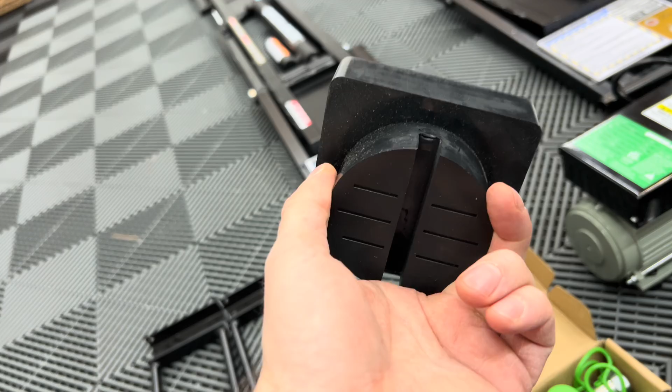All right guys, so I got everything unpacked, what you get in the entire set of your Quickjacks. I did realize you get a few different mounting blocks. You get bigger ones you can use for bigger cars, and also lower profile ones. The ones I got, I believe I was supposed to get the lower profile ones - these are the ones with the pinch weld, which isn't the end of the world since I can use these on other cars. I know my STI had the pinch welds, so those will come in handy in the future, but I'll most likely use these. All they do is sit right in there, and they go right onto the little mounts of where your jack points are on your car.

I was also playing around with the little jack pack, and I noticed on the back it actually lists everything it does, so I wanted to go over that real quick. As I mentioned, it's a 12-volt USB charger, as well as a C port. It's got the LED flashlight, and it's also a battery jumper. Very cool - so if your car is on the side of the road and you have a dead battery, you can actually jump it with this. It has some jumper cables in here, which is pretty darn cool. So there are the jumper cables.

And it's also an air compressor, obviously. It's 150 max PSI, 2,500 peak amps. The thing is pretty darn cool.

Let me just show you the little flashlight. I was playing with this off camera, and it's really cool and nice and compact too. You hold it down there, and wow, that thing is incredibly bright. It also has a strobe and a slower strobe as well. This thing is amazing, I'm kind of hyped about it.

Here's the little ports for the jumper cables, and I showed you over here the USB and C port. I'm stoked about this thing - it's awesome, and the little digital display is very clear and easy to read. This thing is way higher quality than I was expecting.

Not to say I was expecting poor quality, but the overall craftsmanship and robustness of this thing is very impressive. I was pretty surprised about the overall weight of it, which is a good sign that it's made super high quality, not some cheapo thin metal - because you're lifting something very heavy, and you obviously want something very sturdy. But here you go, this is what it looks like.

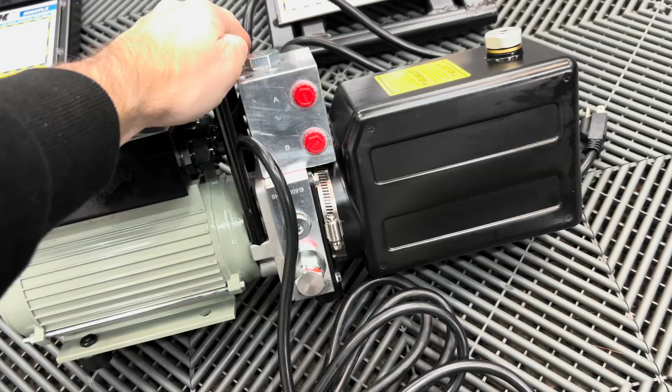I was thinking maybe they filled it, but they probably test these before they send them out, so they have to fill these up with some hydraulic fluid. That is most likely why you're seeing a little bit of residual around here. Don't think your compressor is leaking or anything like that. It comes completely empty, but I'm pretty sure they test these prior to sending them out, so that's why you may have a little bit of residual hanging out.

But here is the control, so it doesn't get any simpler than that. Down, up. The locking system is pretty cool, much like a normal lift. These right here, the little arms, are actually the locking arms. So when you're raising it up, you'll hear it click into different locking sections, so you know the jack is properly locked into place. You lift it up, you hear it click, then you back it off and it'll go down and lock into place.

I do not have ATF fluid with me right now, but I'm most likely going to pick some up tomorrow morning so we can get this thing properly set up, properly bled, and fill these little canisters with some air. We're going to be using the jack pack for that. I believe you have to fill up to 40 to 50 PSI, I'll probably do 45. You can use an air compressor or a pump of some sort, like one you'd use for blowing up basketballs. But I'm going to use a jack pack because I have it and I want to try it out. It's going to be really simple.

One thing I want to mention is that the Quickjack is going to be fantastic on Swisstrax. If you guys know, that's the flooring I use. I have a lot of friends that use these and they work great on it, and as I mentioned earlier, they're very easy to maneuver around on Swisstrax.

The main reason is because when you use jack stands, the weight is so focused on the arms of the jack stands that it can damage the tiles. You can actually see one right there, I just did that the other night. I usually put some foam inserts underneath the jack stands to protect it, and it usually does a good job, but for whatever reason it ended up damaging this tile just a little bit. It's not the worst thing in the world, honestly I have a bunch of replacements, I could just pop it out and put a new one in. It's happened before in the past, and it literally just pops out and pops in, and you're good to go.

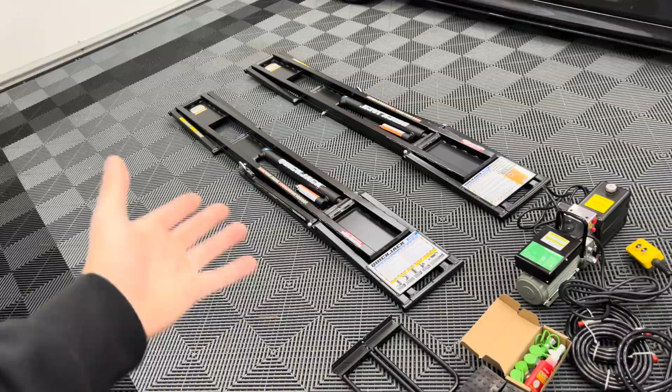You may also know the brand BendPak. BendPak is actually the parent company to Quickjack, so you guys know all the different options and things available from BendPak as well. Who knows, maybe if we get a shop or a larger garage in the future, we can work with BendPak and Quickjack again and get something, maybe a full lift, I don't know. Who knows what the future may hold. But for right now, with my dream F80 M3 and my average size 20 by 20 garage, which I'm incredibly thankful for, these things are absolutely perfect. Again, super humbled, super thankful, can't wait to get this thing set up and used on the car.

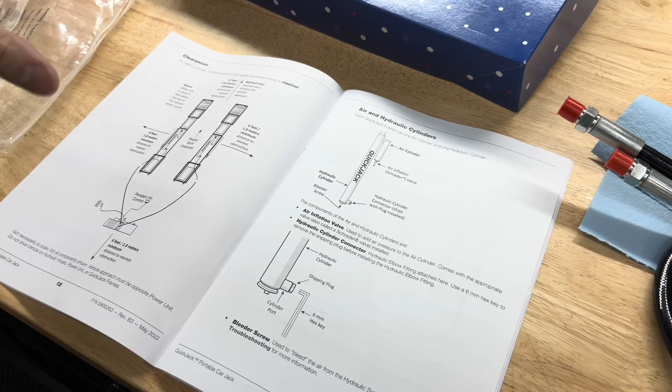What we're actually going to need is everything included in the kit, but there's one thing you need to go pick up yourself, which is some ATF fluid of your choice. It just has to be full synthetic. I went to my local Advance Auto Parts and got some Valvoline ATF full synthetic. I've seen a lot of people use this and they're totally fine. Honestly, as long as it's ATF and it's full synthetic, you're good to go. So what we need to do now is start putting some of the fittings on. We're going to start over here on the hydraulic, and there's actually a plug right here that we need to remove.

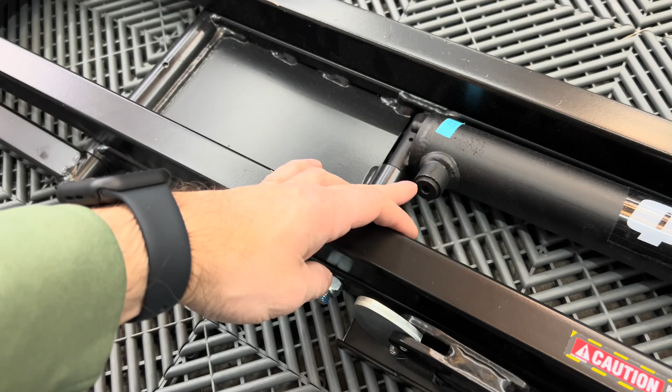I think that's a... I gotta see what size it is, I'll let you know. But we actually remove this, and then we can get the first fitting put in. So they actually say that little plug there is a 6mm, so we're gonna go ahead and get a 6mm out, if I can see it.

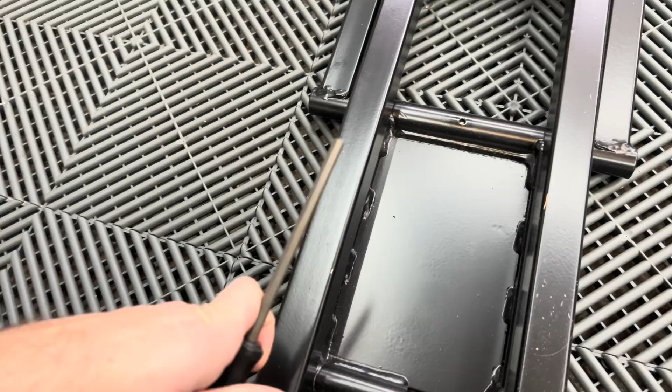Here we go, this is a 6 right there. So we're gonna come over to the Quickjacks and simply just remove this. Oh, I don't know if this is gonna work, I'm gonna have to get an actual Allen key. So that was actually a little big, so I'm gonna use my new Allen keys. Let's see, 6 is the red one right there. All right, so we got the 6mm out.

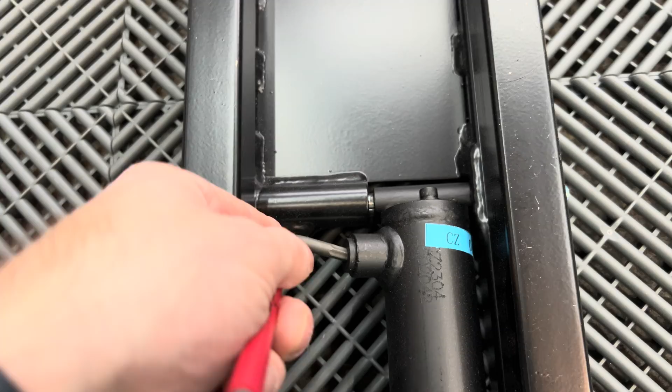We're gonna come over here and simply remove this plug like that. Not much room to work, but once you get it off, I'll show you the next step. All right, so we got the shipping plugs removed.

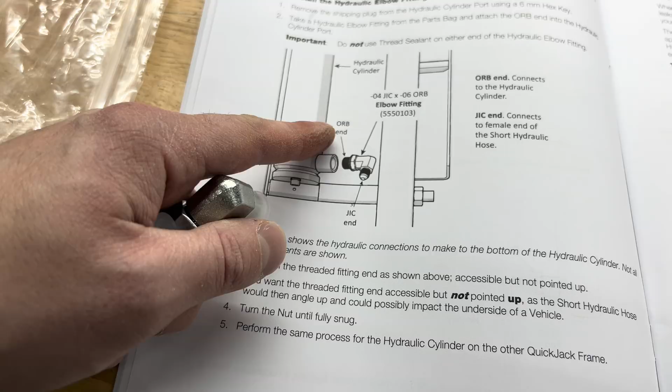Now the next page shows you actually use the ORB end and the JIC end of the little fittings that are in there. The other fittings are quick disconnects, so there's only ones that look like this, and that's what we're going to be using to install on the plugs that were just removed.

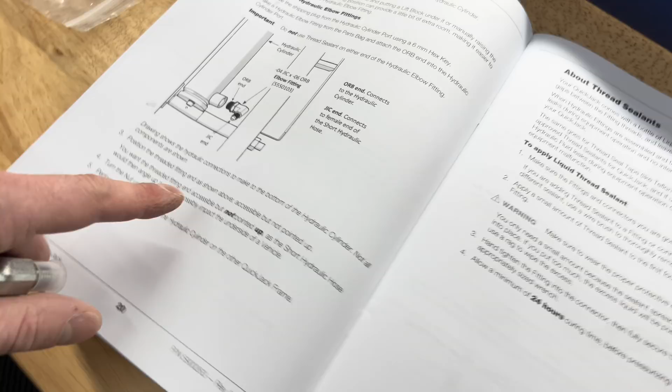Now let's see, you want them fanning, not pointed straight up, but positioned towards the back. I'll show you exactly what they mean. It says position the thread fitting end as shown above. So this is the bleeder screw right back here. You want the JIC end fitted this way above that bar. So I'll show you what that looks like on the actual Quickjack.

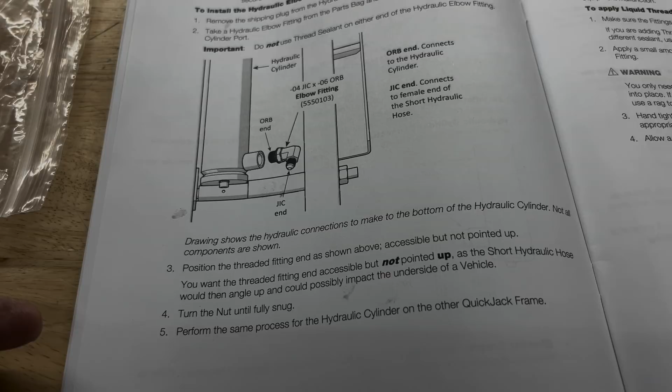Just a quick note, it says do not use thread sealant on either end of the hydraulic elbow fitting. So on these right here, do not use any thread sealant, any tape, anything. These are good to go as is.

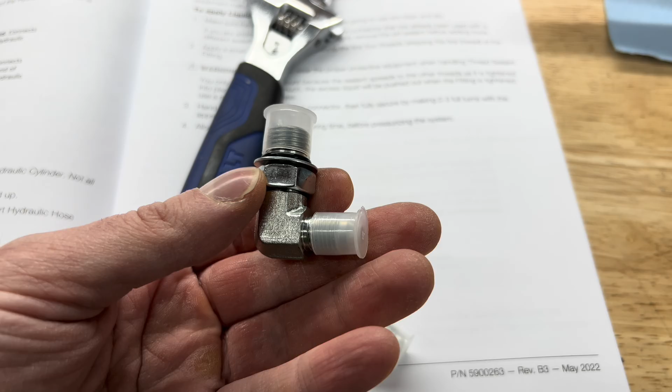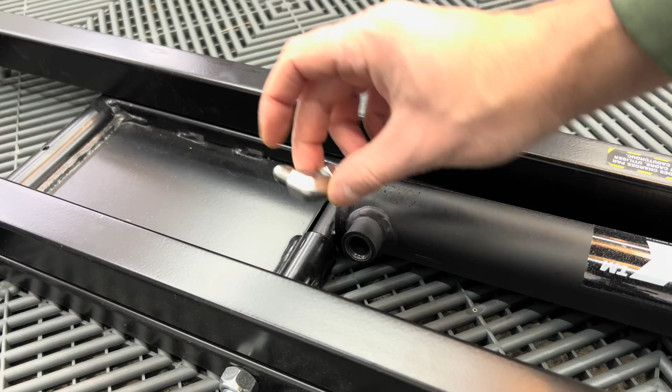All right, so we're on the driver's side Quickjack, and I'm going to take the little shipping caps off. The pointed end is actually going to go back that way, so it's going to be positioned somewhat like this, not like this, not straight up. You want it kind of positioned up on an angle like that.

So all we're going to do is take the threaded end, not the narrow end, the ORB fitting as they mentioned, and thread that into the hydraulic right here. Sorry, it's kind of hard to do at the angle I'm in, but we're going to thread that in. And then you don't want to torque these down too tight because there is a rubber gasket there. So I'm just using an adjustable wrench here.

I'm going to tighten it down until it's snug, but you don't want to wrench on this too much. It's just like a fitting for a hose, a quick disconnect. You don't want to slam it tight because if you do, there's going to be leaks. But there you go, tight enough, we're good there. So now I'm going to do the same thing on the passenger side over here. I guess I'll just do that on camera for you guys. Thread that in.

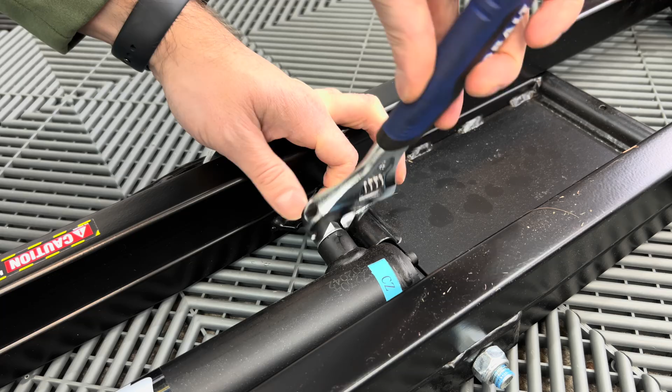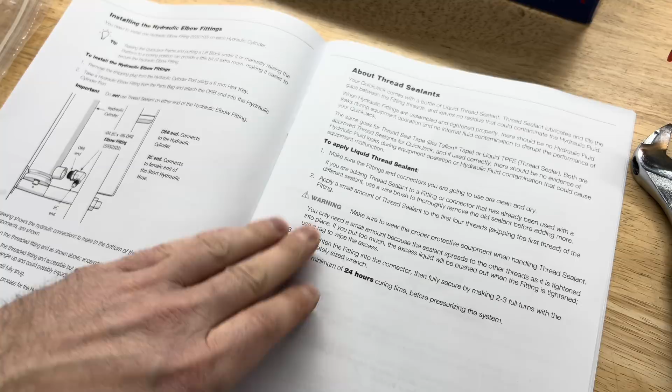All right, so I wanted to mention this real quick. They talk about liquid thread sealant as opposed to using normal Teflon tape. They actually say on this page that they used to use Teflon tape, but they found out that some of the Teflon tape particles would get into the hoses and everything. So that's why they started using thread sealer. You can use either, but it's at your own discretion.

It just says you must read carefully and follow the instructions on how to actually do it, so that doesn't happen. I'm not going to use Teflon tape because they're literally saying here it's not a good thing and it could cause problems. So I'm going to stick to the thread sealant that is provided.

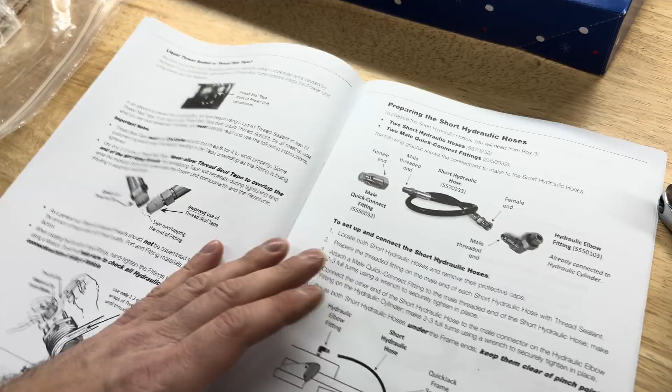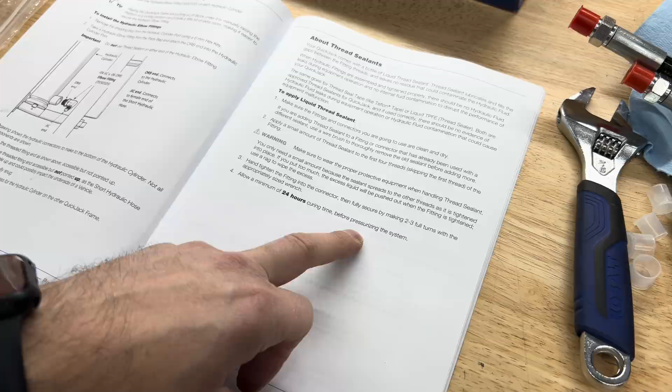Also, another quick note that I think a lot of people skip over: when using thread sealant, it actually says allow a minimum of 24-hour curing time before pressurizing the system. So what a lot of people do is get this set up and they're so excited that they start pressurizing it and going through the whole bleeding process, and then they're going to have issues. So we're going to wait a full 24 hours before we're actually pressurizing it and getting it completely ready to go.

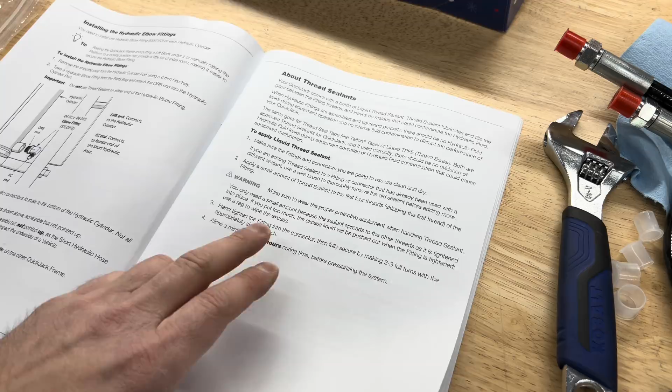I just want to make note of that because I feel like a lot of people skip that over. All right, so now what we're actually going to do is get the short hydraulic hose ready to go.

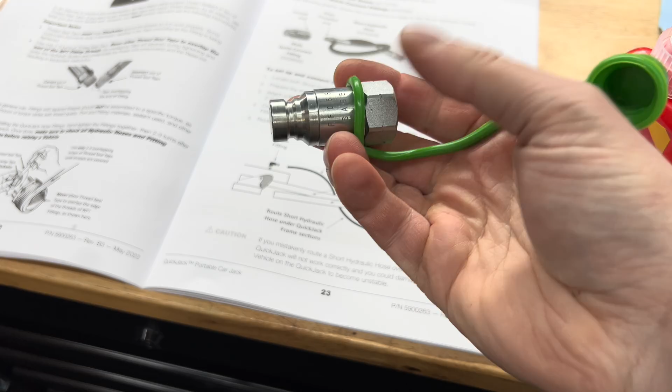So I have this one over here. There's two of them, obviously for each side. This is going to connect to the new fittings we just put in. We've got these short hydraulic hoses ready, while the longer ones will run to the power unit. We're going to start applying some thread sealer, so you get the male quick disconnect, which has a threaded side and a quick disconnect fitting.

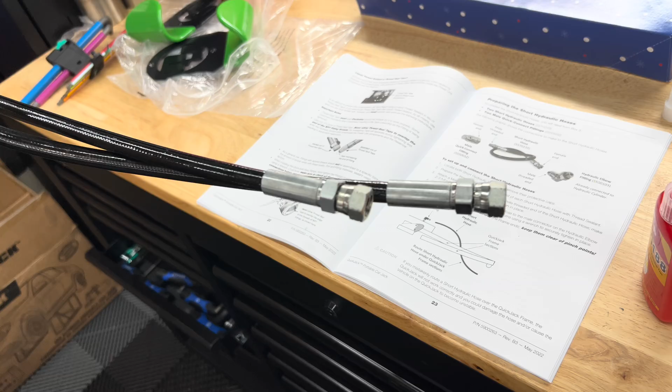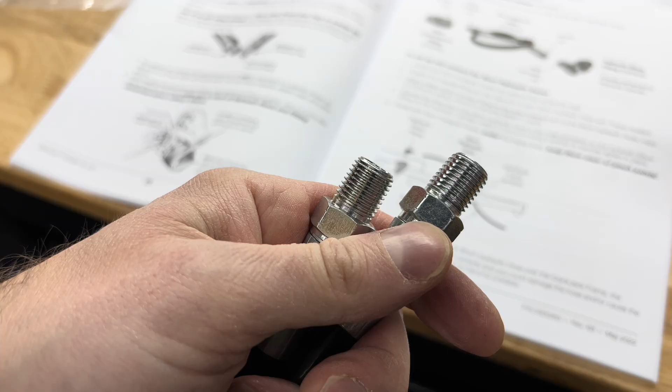We're going to attach it to the short hydraulic hose on this side. On the other side, there are fittings that attach to the hydraulic cylinders on the Quickjacks. We'll apply thread sealer on the first 4 threads, skipping the first one so you don't get sealer in the lines, then tighten those down. It says make 2 to 3 full turns using a wrench to securely tighten in place—you don't want to get crazy with them. Let me apply the thread sealer and get those fittings on.

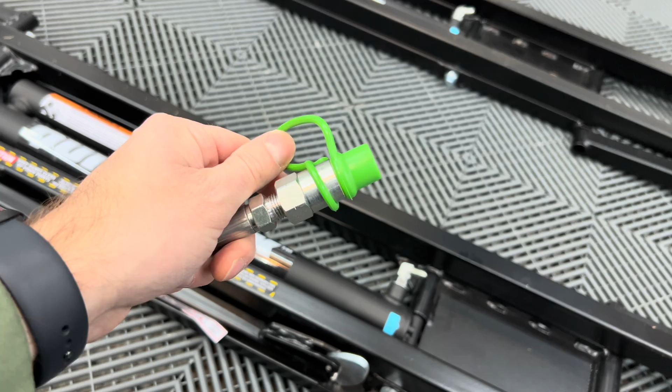Both of these hoses are ready. Now we're going to connect the other end to the hydraulic cylinders on the Quickjack. It says not to use thread sealant here, just on the quick disconnect section. Tighten down hand tight, then do 2 to 3 turns. I tightened it down as much as I could without overdoing it, just enough that it's nice and snug.

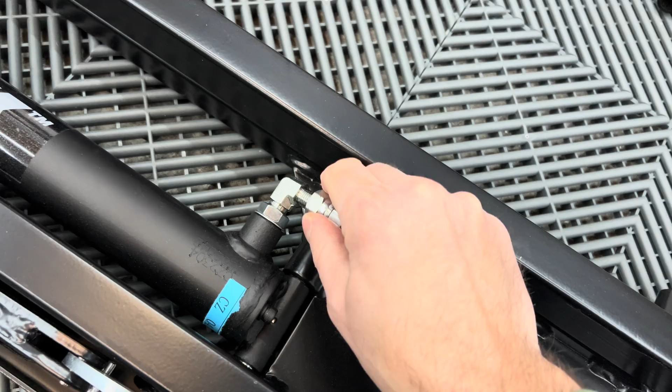Now we're going to slip the female end onto the male end, routed underneath here—let me show you a demonstration. It slips right under there, and connects to the elbow we installed first. When connecting, make sure you're not cross-threading, and that it goes on nice and smooth. Tighten this down 2 to 3 turns until snug, routed underneath like that, and do the same on the other side. I'll get that situated and then move on to the longer hoses and the compressor.

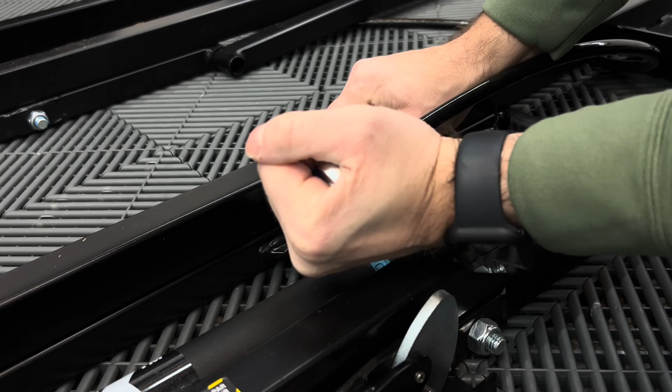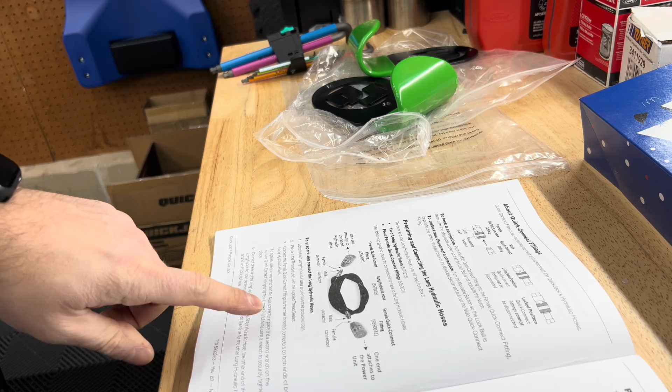Next up, we're going to take the longer hoses that run from the Quickjacks to the compressor, and cut the zip ties off. We're using thread sealant on both sides since they're both threaded and both getting quick disconnects—so you'll be doing this 4 times. I'll remove the little red caps, put thread sealant on the first 4 threads, skipping the first one, then screw down the fittings, tightening 2 to 3 turns as normal. I'll do these real quick, probably just the first one on camera and the rest off camera.

The longer hoses are all ready and tightened down. Now we come over to the short hydraulic hose connection, pop the little caps off, and connect one end of each hose to one of the quick disconnects. It just pops right on. Now we can move over to the compressor and get that set up.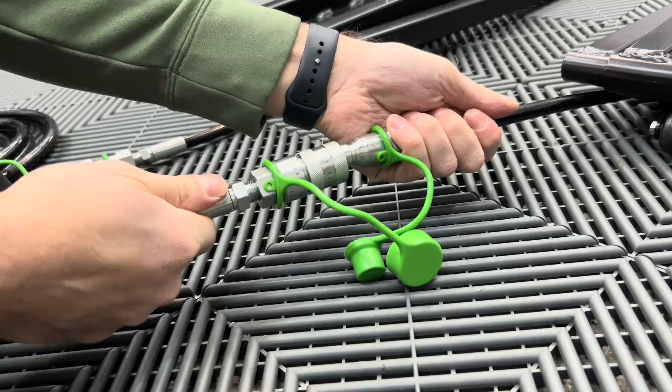I've got everything set on the Quickjack side. The next step is to pressurize the system—you fill these canisters between 40 and 50 psi. I'm going to do 45, right in the middle. But as I mentioned earlier, you shouldn't pressurize the system until the thread sealant applied to all the fittings has cured for a minimum of 24 hours. I could just do it now for the video, but I'm going to do it properly because that's how I do things, and I want you guys to do it right too. So I'll let the Quickjack lines sit for 24 hours, and I'll probably jump back on this tomorrow night to get everything bled.

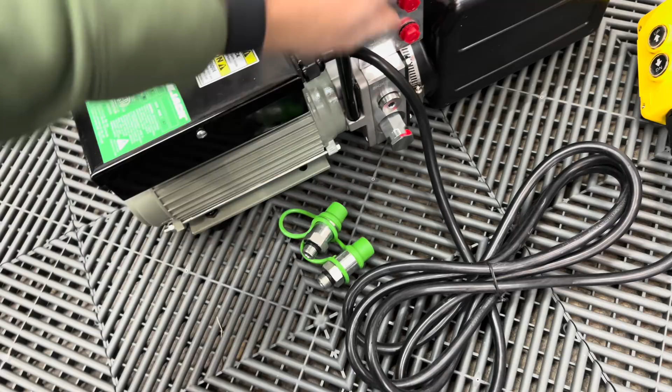But what we can do in the meantime is actually get the compressor all set up. There's 2 more fittings that come in the box, and all we're going to do is take these little shipping plugs out and insert these into here. You're not going to use any thread sealant on these since it has a rubber O-ring, it says don't use any Teflon tape or anything. Then we can connect them, just wrench them down, nice and snug, nothing too crazy. Then this will be pretty much set, but we got to fill it with some ATF fluid as well. I suggest doing the bottom one first so you can get a wrench in there, and then the top one.

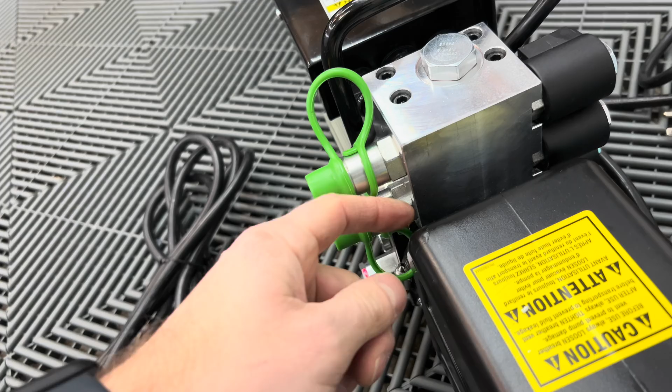All right, so we got the fittings all snug down. Pretty simple, a little difficult to get to that one right there, the bottom one, because the reservoir is kind of in the way. It's a 22 millimeter if you don't want to use an adjustable wrench like I did, but I got it snug down pretty well, so we're good there. As I mentioned, these have gaskets, little O-rings on there, so you don't need to apply any thread sealant or any tape or anything, so you're good to go there. You don't want to over tighten them as well, since it's just like a garden hose that you're putting a quick disconnect on. You don't want to do it too tight, because if you do, it pinches the seal and actually can create a leak. So just make sure they're snug.

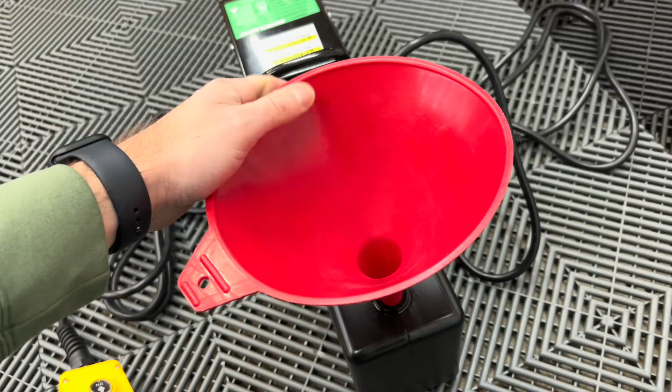What we can actually do is actually fill up this reservoir. This funnel's a little too big, I use this for my oil changes, but I'm going to get this filled up, and it should be a half inch below the hole here.

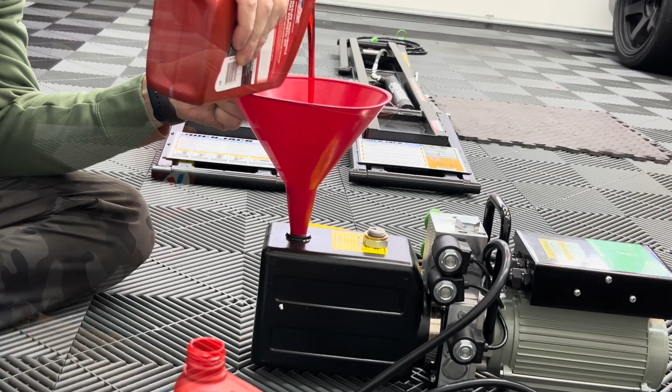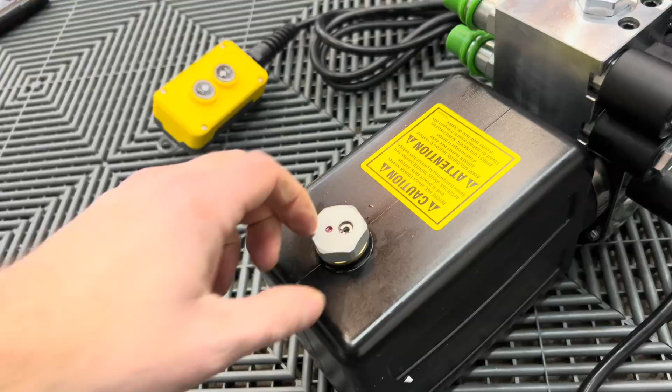All right, so we got the whole reservoir filled up. As you can see, it's about a half inch from the top here. So we can go ahead and just seal this up. You don't have to do this too tight or anything like that. This is actually a self-breathing valve right here, so that's good, because you won't have to worry about opening it up or anything like that. And in case there's air in there, obviously we're gonna bleed the system and everything like that, but that's a cool little feature right there.

All right, so everything that I could get done now, I am finished with. I got all the hoses kind of ran, I got the reservoir or the compressor all filled up and everything ready to go, the fittings on. Again, I just have to wait for the thread sealant to seal for the full 24 hours. I'm going to catch back up with you guys tomorrow once this is fully sealed, and we can actually connect this to the compressor, bleed everything, pressurize the system with the 45 PSI, and we'll be good for takeoff on the M3.

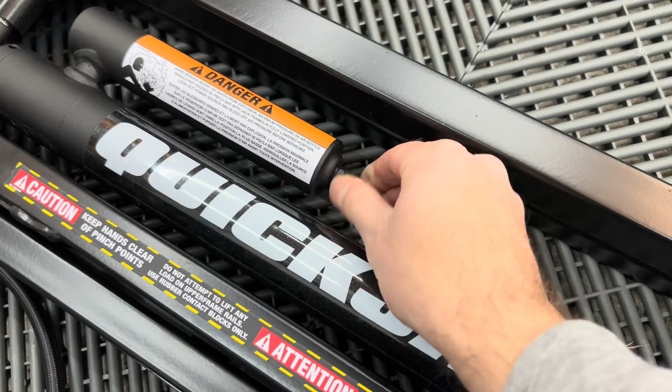It's been actually over 24 hours since we did the thread sealant and got all the lines ready. I actually got these flipped around the other way, so we got the compressor over there, so we're all good to go. But now what we're gonna do is pressurize the system. If you look at these little canisters on the side of the hydraulics, there is a little canister that we're gonna fill up with air. Now it says you can do anywhere from 40 to 50 PSI. I'm gonna do 45 just to keep it right in the middle, but we're gonna use the new jack pack. So I got the little hose connected to the side.

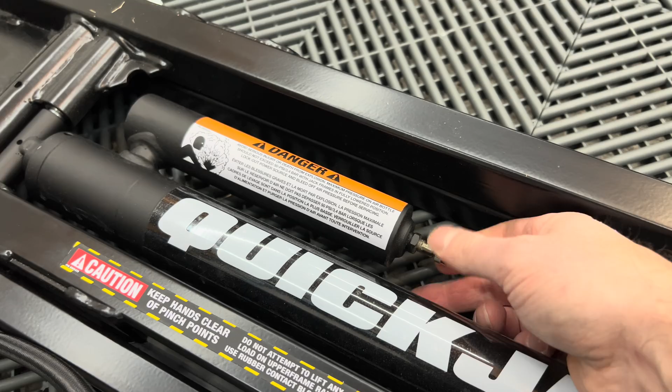So before we actually start, they actually want you to release any air that's already in there. So you actually take the cap that is provided on the actual cylinder there, and there's this side to it, and all you do is put that side in and twist out the little valve in there, and it's going to release any air. So once that is done, go ahead and tighten it back up. Make sure that's tight. Now we can go ahead and put the air hose on there, lock it down, turn it on, set it to 45 PSI, then hold down pump, and it'll go.

All right, so the jack pack cut off at 45, so we're good there. Now I'm going to do the same thing on the other side, and then we can go ahead and start connecting the lines to the compressor and start bleeding. I know this has been long, but I'm taking all the necessary steps and doing a detailed install setup so you can see exactly how to do it, and so your Quickjacks operate properly. All right, so 45 PSI in the canisters, and we are good to go.

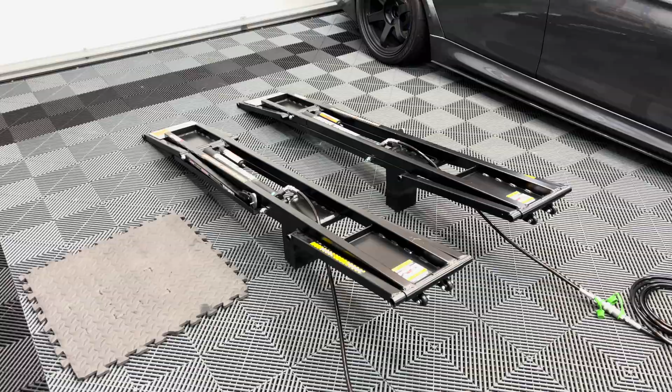Next step is we're actually going to start bleeding. What you need to do is stack up the blocks supplied with the compressor and this whole kit. You do 2 large and then 1 medium on top, and place them underneath this plate right here, which is right by the bleeder valve. Then we're going to connect these and start running it.

Now what we're actually going to do is raise it up about 8 inches. You do not want it to lock into the first lock place. So you're just going to raise it up, lower it, 3 times. Once we do that, we're going to crack this open and put some rags and towels underneath to get as much air out as possible. The reason these are lifted is because air travels up, so when it's raised like this and we start pressurizing the system with hydraulic fluid, the air rises to the highest point and then bleeds out, getting all the air out of the system. So let's go ahead and plug this in.

I've got to turn my heater off because I don't want to pop any breakers, just to be certain. So let's go ahead and get this done. We're going to raise it 8 inches and then bring it back down. We won't put it in the first lock position, we'll do that 3 times, and then we're going to bleed it. So all you do is hold up.

Right now it's pushing fluid through the lines, and it should start raising in a bit. So there we go, getting some movement. They're going to be a little uneasy at first because it's pushing the hydraulic fluid through the lines. Now hold down. Right now I'm holding down, so it's moving very slightly back and forth. You can't really see it right now because there's pressure in the system, so I'm just going to keep holding it until it lowers. Then we're going to raise it back up 2 more times. You can see that side went down a little bit, so I'm going to do that 2 more times. Once we're on the 3rd lift and bring it down again, we can start bleeding.

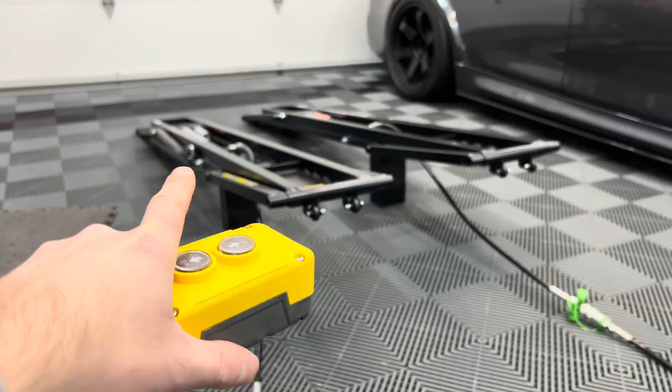So let these things come all the way down. Right now there's a lot of air in it, that's why it's doing that. That's not abnormal, that's normal. All right, so we did 1 cycle so far. I actually had to put my hand on this one on the left side, didn't put any pressure, literally just laid my hand on it and it started going down. That one wasn't going down, so I just put a little bit of pressure with my hand and it went down, no problem. So now let's do it 1 or 2 more times.

They're going to raise unevenly right now just because it's getting the air out. So obviously we're going to stop before the first lock, like that, and then lower them down. Again it's going to take a little bit because it's got a bunch of air in it, but it's pushing all the hydraulic fluid through the line. I'm going to do this 1 more time, and then I'll show you how to bleed from the hydraulics. All right, so I did it 3 times.

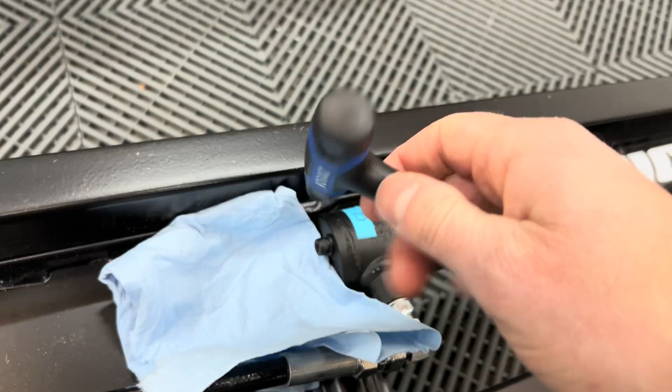Now what I'm going to do is take a 3/16 Allen, and with this little bleeder screw right here, get some towels, and all we're going to do is open it up a little. You might hear some air coming out, and the reason is because when we're putting it up and down, it was pushing all the air up to the top here since it's raised, and then we can bleed it out. Once you stop hearing the air, you can close it back up. We're going to do the same thing on the other side, as many times as it needs to get the air out. So let's go ahead and get this done.

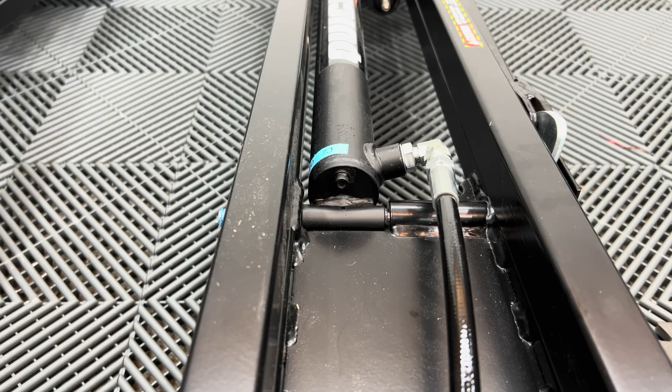So if you probably heard, I don't know if you heard it because the mic is on the other way. Air squirted out - maybe I'll get it on the next one so you guys can hear it. A little fluid leaked out, not much. You can see it on the rag there.

I already did the other side, but I'm gonna go ahead and raise and lower it, the same thing, to get as much air out as possible. Once I don't hear any air coming out, just hydraulic fluid, we're good to go. Then we have to go through another procedure and raise it up, open it one more time, then close it, and we should be good.

So I got the system fully bled. There's only one more thing to do. I did the initial three times they told me to do - up, down, up, down, up, down - and then I bled it. Then I did this one five more times: up, then down, bleed, up, down, bleed. And this one was eight more times - this one had a little bit more air in it.

So what they actually tell you to do next, to make sure there's no air in here, is raise it a little bit, put a rag underneath the bleeder screw, open it up while it's still in the air. Then any remaining air or fluid is going to seep out - tighten it back up, raise it a little more, do the same thing, tighten it back up, and do it for both sides.

And you should be good to go. So I'm gonna go ahead and do that, and then we should be done bleeding this entire system and everything is good to go. Then we can lift up the M3 - a little nervous, but everything should be okay. Let's go ahead and get that done and see how this thing finally works.

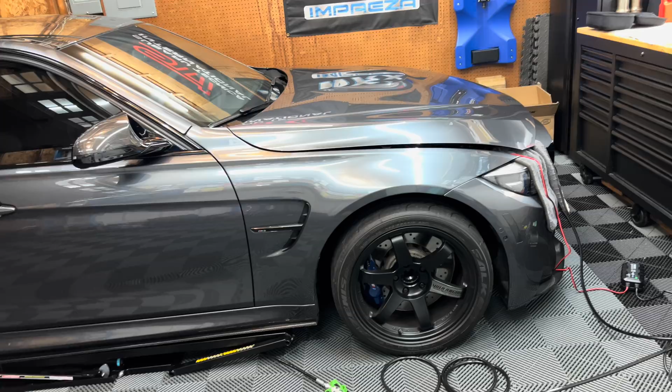All right guys, so I went ahead and got everything underneath. I actually ended up having to jack up the rear subframe just a little bit, because the front - when I first tried it in the beginning of this video, I just jacked the car up, so there was a little more room. But since then I've driven it and everything settled, so the front was a little too low. So all I did was take a jack and bump it up a little in the back here on the rear subframe, and I was able to get it underneath no problem.

I used the medium-sized blocks. I think I'm going to pick up the low-profile blocks - I was supposed to get those actually, but they sent the wrong ones, they sent the pinch weld ones. But I got everything centered, I got everything good. A little nerve-wracking, but let's take it for its first lift in the air.

All right guys, so it is up in the air. Everything went smoothly, I went really slow. I raised it a little bit just to make sure it's still on the proper spots, and it is. I raised it to the first notch because I wanted to make sure, obviously, but pretty darn amazing.

I'm gonna go up all the way. Obviously I don't think - I know I'm not gonna hit the garage, but be mindful of your space when you're doing this. This lifts up a full, I believe, 24 inches, so you do need to be a little careful. You don't want to raise it too high, but so far everything is good.

So what I did was raise it, get past the first lock, and then back it off, and it locks in like that. So you're good, but the second lock is all the way back here, so I'm gonna go ahead and try that one. But before I do that, I'm gonna look at all the lines, make sure there's no leaks or anything. So far, everything looks good.

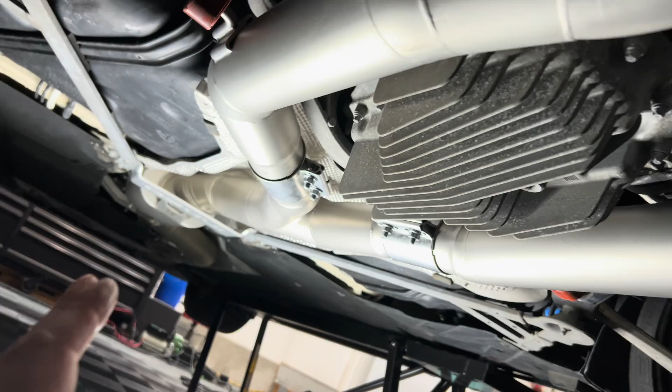So I actually just went underneath and tightened up my exhaust, because I recently installed this, and I just wanted to tighten down all the bolts, do a bolt check, because I've been driving it and sometimes the exhaust and clamps and everything kind of loosen up. So I tightened everything up using my new 1/2-inch Wera, and it looks amazing.

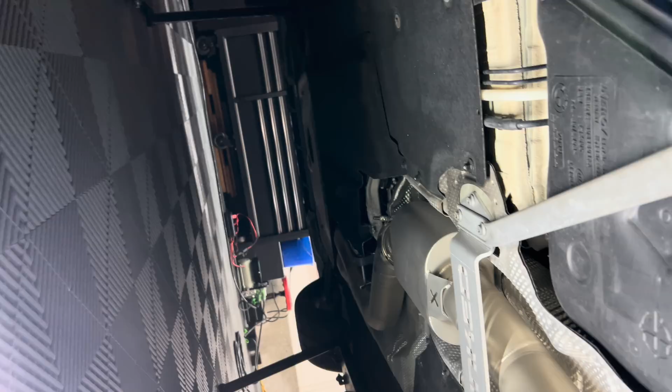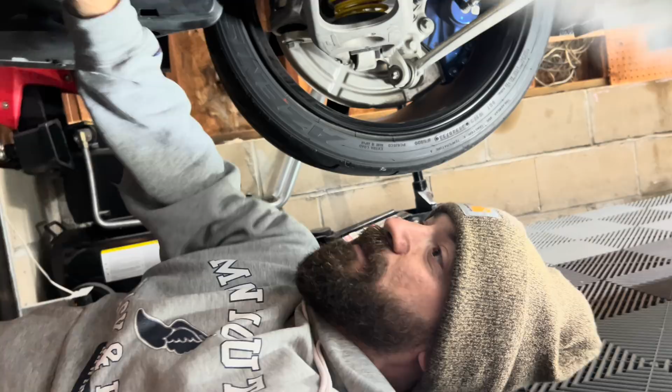Oh man, so I'm literally laying sideways underneath the car. Usually I was like this, and the car was right here. I was trying to work, but now I'm literally, I can sleep under here. This is insane, so cool. Oh my God, amazing.

All right guys, so I'm gonna go ahead and lower it. There's no need to be having the car in the air right now. The door's open, it's pretty cold right now, so I'm kind of anxious to get back inside and warm up. But all right, so when you lower it, you raise it up a little bit, and then the locking arms are free, because usually it's like this when it's locked in.

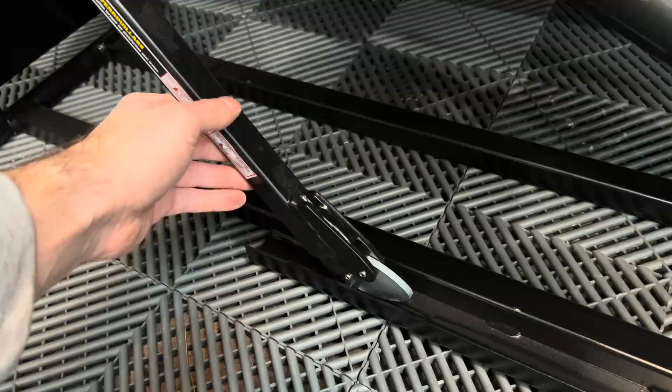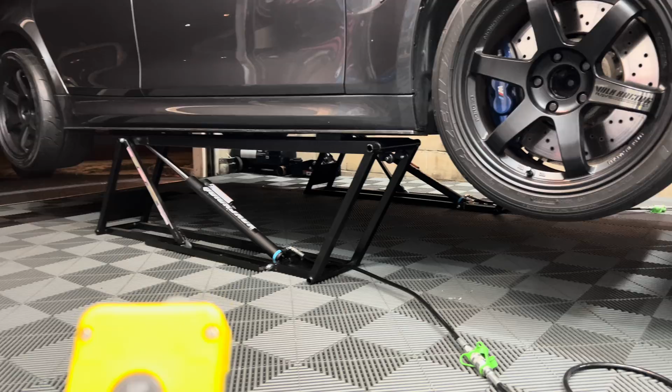So you just lift it up and let it go like that, and then you come back over here and just lower it on down. Make sure each of them are going down at the same time, which they are. Nice and safe, make sure the tires are not hitting the lines. It's gonna go over the last lock and go all the way down. All right, so before I lower it all the way down, I'm gonna get the jack behind there so I can get that out. And yeah, we should be good.

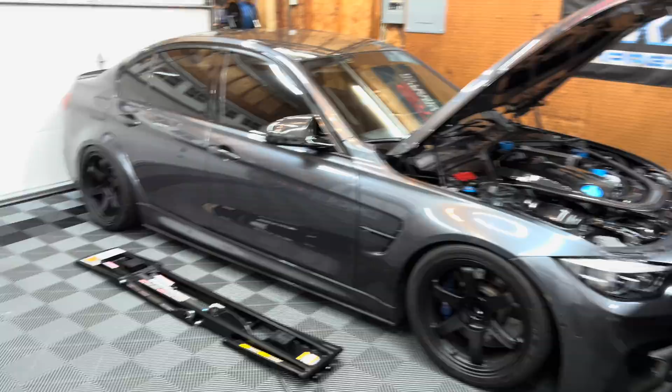All right guys, car is back on the ground. My anxiety is gone, knowing that it went smoothly, and I feel much more comfortable now that I tried it and did everything. Obviously, the first time, getting used to the positioning, making sure it's in the right place, it's always nerve-wracking. Honestly, every single time I've jacked up a car and used jack stands, I feel the same way. But seeing how sturdy this is and how easy it was to position, I feel so much safer under the car now.

It's just absolutely incredible. I know this video was a little long, but I really wanted to go over each step, show you guys exactly how to set it up. I've seen a lot of videos of people getting these and just blowing over the setup real quick, and a lot of people were confused. So hopefully my video was a little bit more clear, and you guys can understand exactly how to set it up. Just make sure you bleed and bleed and bleed as much as possible until no air comes out at all, and then you'll be good to go.